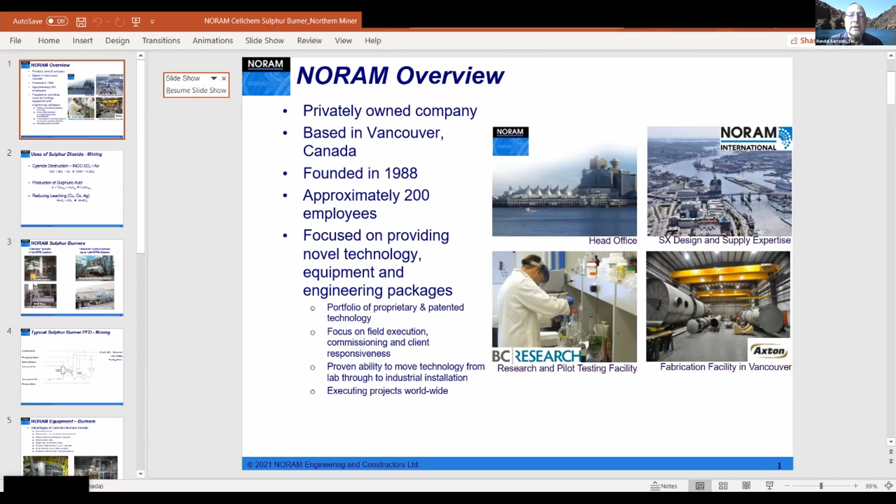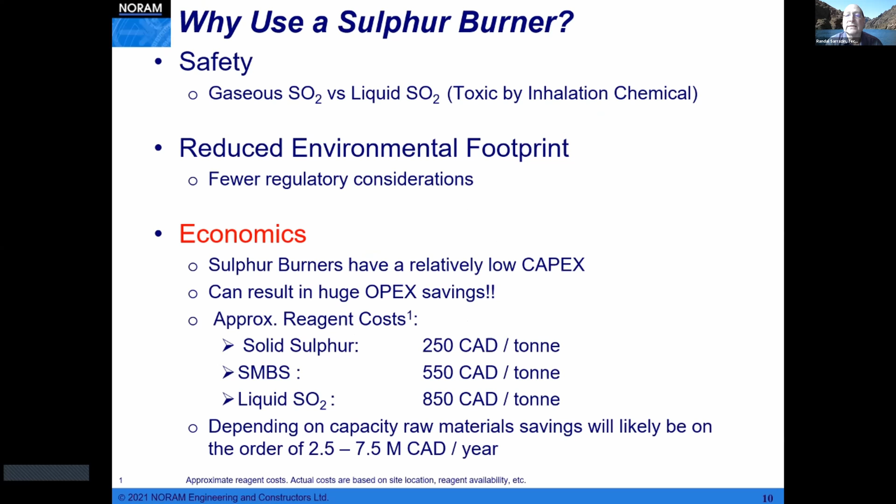Okay, that's great. So we are NORAM Engineering and Constructors. We're based out of Vancouver, British Columbia, privately owned company, founded in 1988, approximately 200 employees. Our head office, again, Vancouver downtown, that's where all the magic happens. We have a satellite office in Sweden, which handles our equipment supply overseas, and they specialize in the design and supply of SX, which is a high silicon stainless steel. We use that for absorbing towers, converters, heat exchangers, and piping and valves.

We also have a company, BC Research, in downtown Vancouver as well, and they handle laboratory research and pilot plant testing. We also have a world-class fabrication facility called Axton, also in Vancouver, and they do a lot of the equipment supply and manufacturing for NORAM, as well as third-party fabrication. Within NORAM, we have several business units, in particular the sulfuric acid and nitration groups, which are our two biggest and well-known worldwide. But we also have electrochemistry, pulp and paper, biosystems, and environmental as well.

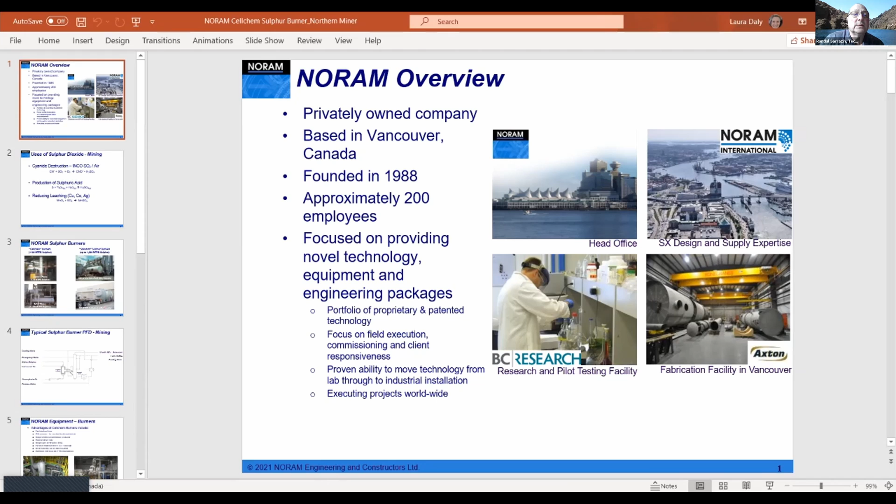So how does NORAM fit into the mining industry? Go to the next slide, please. Typically, we use sulfur dioxide in mining. Some of the uses of sulfur dioxide, especially in gold mining, are for cyanide destruction. You have production of sulfuric acid, and with a sulfuric acid plant, you also have leaching for copper, cobalt, and silver. So with sulfur dioxide, otherwise known as SO2, a lot of the mining sectors are using liquid SO2 right now. So NORAM has their own technology called CellChem sulfur burners. So next slide.

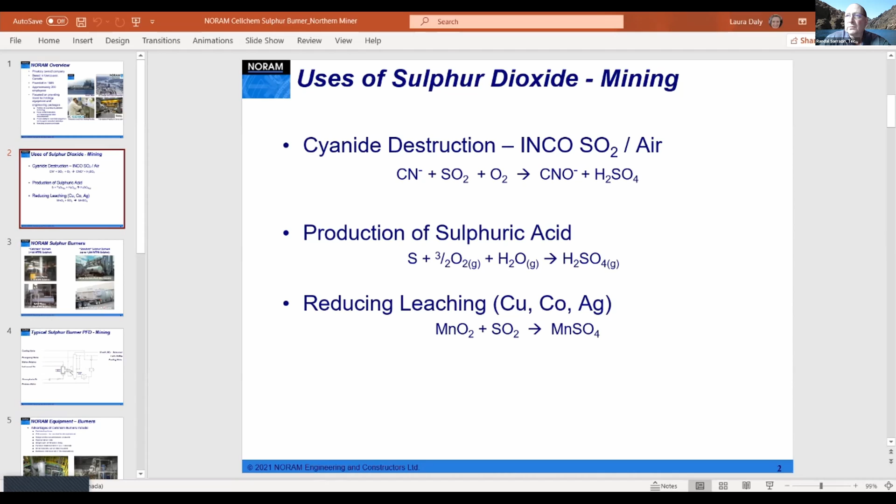So on the right-hand side, you'll see a typical sulfur burner for a sulfuric acid plant. Now, these types of burners can be used for up to 1,200 metric tons a day of sulfur burning for like a 3,000 ton a day sulfuric acid plant. The top right is a 280 metric ton a day acid plant, so you can see the size of the sulfur burner there. And below is a sulfur burner for an 850 ton a day sulfuric acid plant.

So for the mining industry, NORAM has what's called a CellChem sulfur burner. In the top left-hand corner, you see the size of the burner, which is relatively small. Right above the yellow box, you'll see the actual furnace is very small compared to a normal sulfur burner in an acid plant. You also have a quench tower, which is the vertical component. In the bottom, you have our spiral flame furnace, which goes from 4 to 120 metric tons a day. So the cyclone flame, in the top, is below 10 metric tons a day, and the bottom one is between 4 to 120. So next slide.

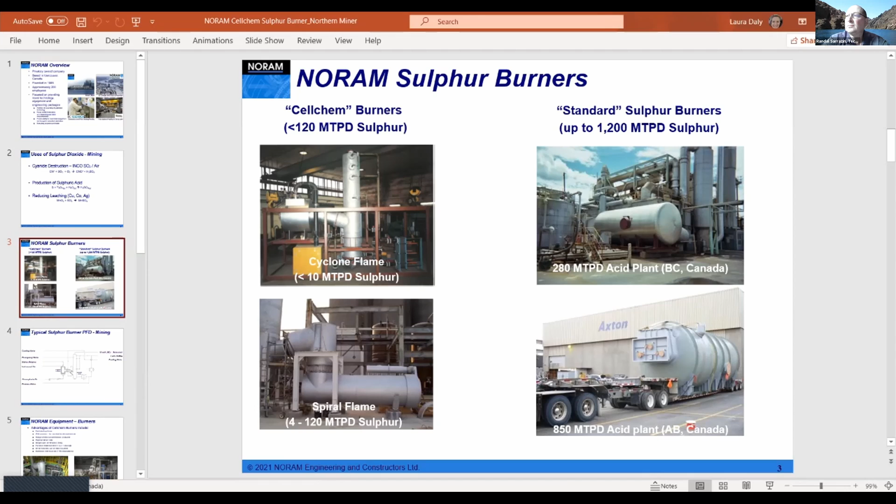So for our sulfur burners in the mining industry, especially with our CellChem units, you need a raw material, which would be your molten sulfur, and you need atmospheric air. The two of them burnt, you end up with SO2. So your other raw materials for this system loop would be cooling water and process water. On the end of the furnace, you'll see a quench tower.

Interesting, for most of the sulfur burning, what you'll see is a 9 to 11% SO2 concentration in a typical sulfur burner. With our CellChem sulfur burner, you see a higher concentration of 18 to 19% SO2, and your byproduct is essentially a 1% sulfuric acid by weight, and that can be turned around and used for effluent and several other places within the mine.

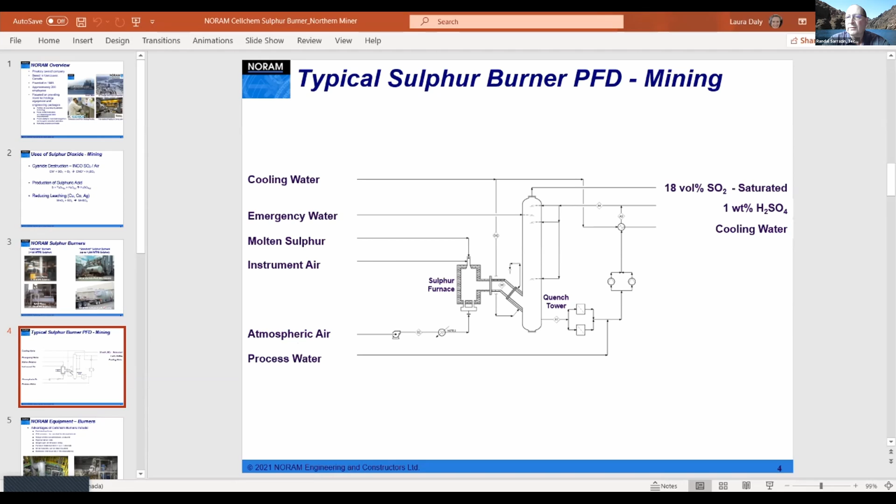So, what are the advantages of our CellChem sulfur burners? One of them is a very fast startup time. In the bigger sulfur burners, you'll have a lot of refractory, in which case on heat up, you have to take a long time to make sure the refractory is heated correctly. With our CellChem sulfur burner, you have extremely fast startup times with a very limited amount of refractory.

You have a wet process on the exit, which is combusted with atmospheric air, and you get a wet SO2. The range of SO2 concentrations can be reduced, so you don't have to run at 19%. So you have some flexibility there. You have a very high turndown ratio, probably as low as 25% of design. You have a single layer of refractory, again, that helps with the heating up and cooling down cycles.

And the residence time is very short, and that's the reason why we can go with such a small burner. We have an atomized spray for the sulfur, which ignites very quickly, a very, very fine spray. So the residence time in this type of furnace is much shorter than you would have in a typical sulfur burner. One of the big advantages is a very small footprint, and it can be skid mounted. And of course, we have an extensive reference list of over 180 installations of our CellChem sulfur burners.

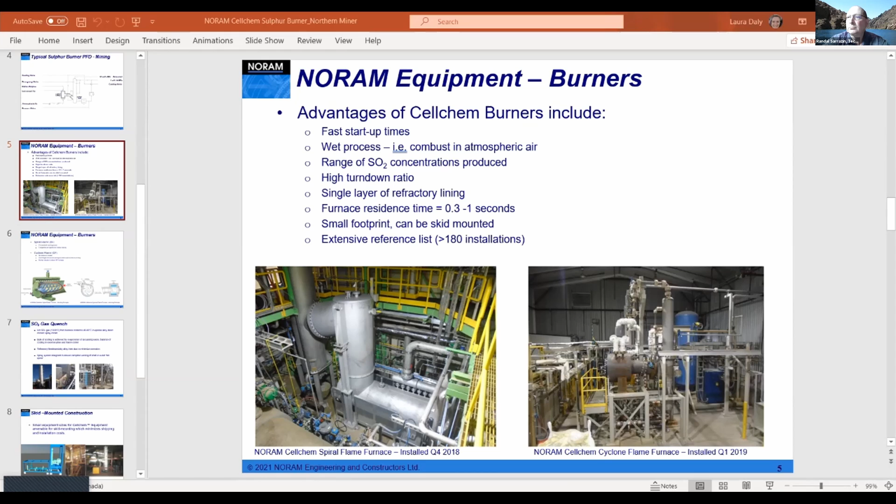So I mentioned we basically have two types of sulfur burners. We have a spiral flame, which is more for the bigger amounts of sulfur burn, up to 120 metric tons. And then we have the cyclone flame, which is for less than 10 metric tons. And you can see it's a very small burner. On our cyclone flame, we actually have no jacket on the vessel, and we have centrifugal forces and axial gas outlets to induce the mixing. And the burner size is like a quarter of the size of a standard sulfur furnace.

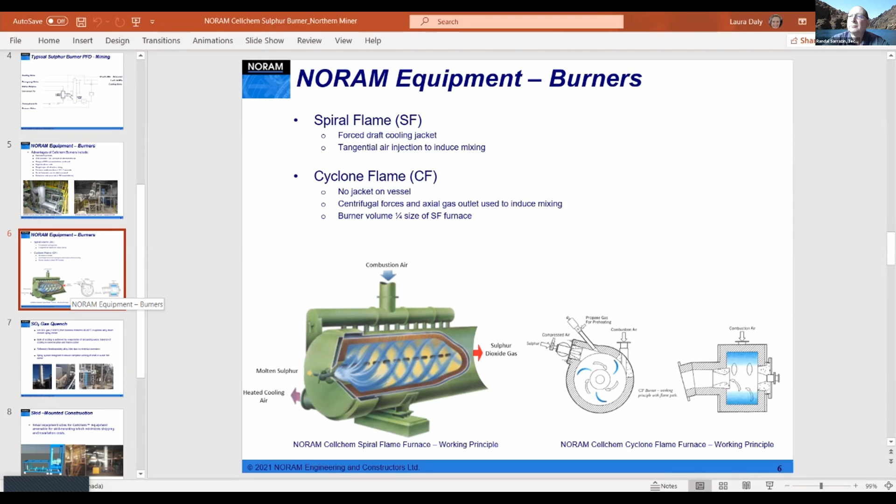Next slide. So I'm going through these fast because I know I only have like 8 minutes.

So I mentioned the quench tower. So our quench tower cools the gas from the furnace from 1300 degrees C down to 40 to 60 degrees C. And we have a special alloy spray cooler. The bulk of the cooling is achieved by evaporation of the circulating water, and the balance of the cooling is through an external plate cooler, and you'll see that in the bottom right-hand corner.

So the tower itself is refractory lined with a special alloy inlet duct to minimize the corrosion. So the spray system itself is designed to ensure complete wetting of the whole shell to avoid any hot spots.

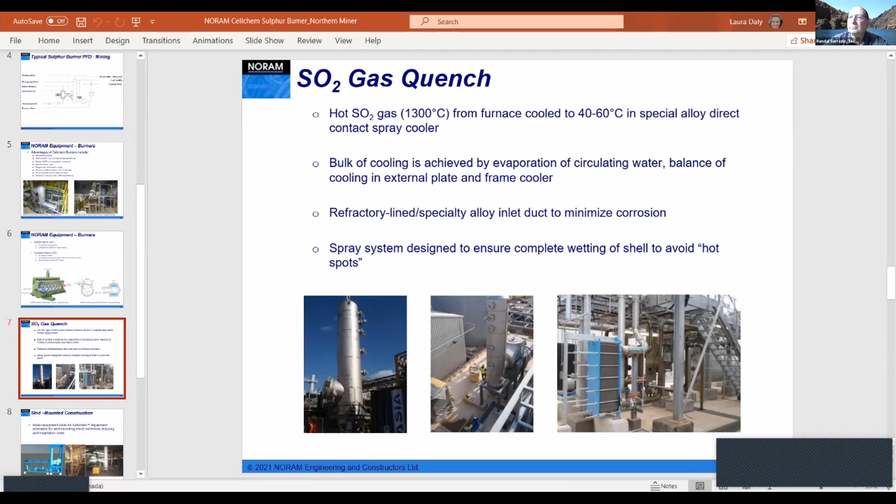So one of the biggest advantages of our Cellchem sulfur burner is the fact that it is a very small footprint, and it can be skid mounted, which minimizes your shipping and installation costs. So you can see a picture on the right-hand side, and of course the 3D model of what it would look like skid mounted.

As well, of course, we need molten sulfur to supply the sulfur furnace. So we also have a melting skid that can be supplied with the sulfur burner. So it depends if you want molten sulfur or if you want a prilled or bagged sulfur to come in. We have a melter skid mounted system that would feed the sulfur burner.

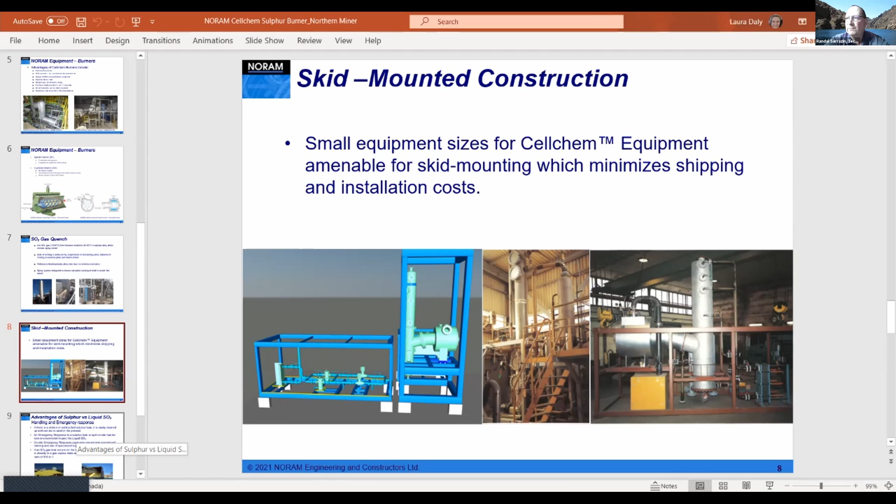So, again, I mentioned liquid SO2, which is very typical in the mines right now. Our Cellchem sulfur burner competes with that liquid SO2, and there are some advantages of using molten sulfur in our Cellchem system compared to a liquid SO2. First off, liquid SO2 is becoming very hard to get through the market. There's a lot of taxation and, I guess, in the transportation of the material, whether it be rail cars or tank trucks, you have tariffs being put on by the railways to haul it because it's a TIH material.

So when you're in remote locations, it's also very hard to get liquid SO2 to site compared to molten sulfur. Molten sulfur is probably one of the most traded commodities next to sulfuric acid worldwide, so the supply of molten sulfur is always going to be there. Same with prilled sulfur. In Vancouver, we have two great piles of prilled sulfur in North Vancouver. So from a handling and emergency response side, the prilled sulfur is much quicker to deal with.

Molten sulfur, if it's spilled on the ground, is going to cool off and just freeze up. So if prilled and molten sulfur leak, it's easy to clean it up and reuse it in the process. From an emergency response standpoint, a sulfur spill on site has far less environmental impact than liquid SO2. Your on-site emergency response personnel don't have to be nearly as highly trained to deal with prilled or molten sulfur as with liquid SO2.

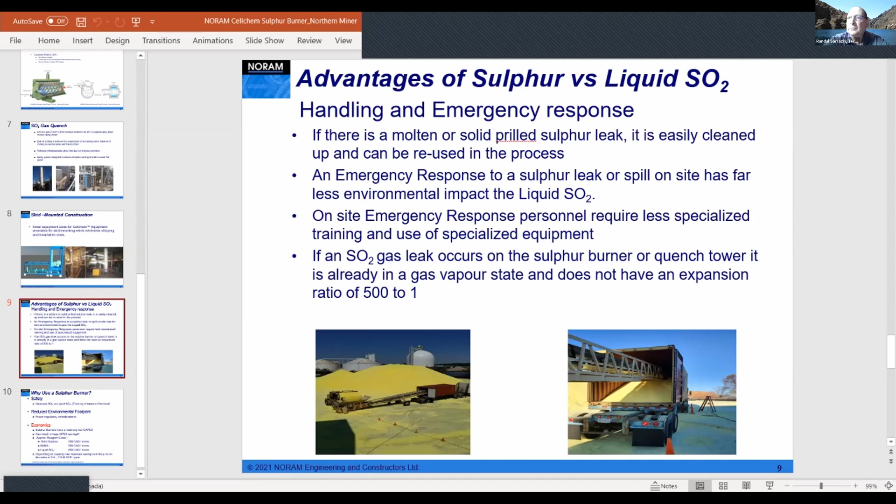So why use a sulfur burner? Number one, safety: gaseous SO2 versus liquid SO2, as I mentioned. You have a reduced environmental footprint and far fewer regulatory considerations, especially in Canada. When you're dealing with liquid SO2, you have what's called E2, emergency regulations with Environment Canada. So there's a lot of that to consider.

For economics, sulfur burners have a relatively low capex and can result in huge opex savings. If you're looking at reagent costs, a delivered cost for solid sulfur, and again these numbers move around quite a bit, you're looking at 250 Canadian dollars per ton, compared to SMBS at 550 Canadian dollars per ton, and liquid SO2, which moves up and down but usually on the upside, at 850 Canadian per ton. So depending on capacity, your savings for a Cellchem sulfur burner would be in the magnitude of 2.5 to 7.5 million dollars Canadian per year, which is pretty significant.

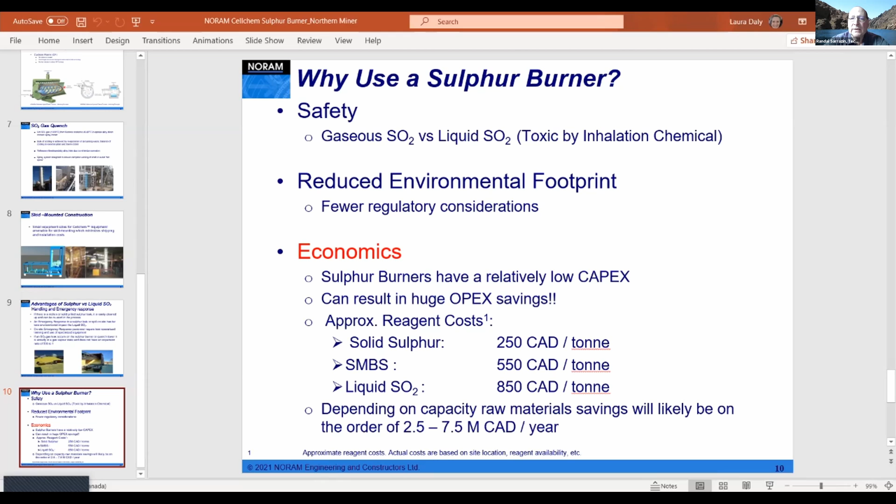So again, the Cellchem sulfur burners, especially in remote locations, have very low maintenance. They're skid mounted, can be placed there and really just run. All you've got to do is supply it. So essentially, that's the presentation.

Excellent stuff. Thank you very much, Randall. A very compelling case there. Given the advantages of the sulfur burner and solid sulfur, where is the trend in the industry right now? Is the trend toward sulfur burners compared to liquid? Well, we're sure hoping so. That's why we wanted to bring our technology to the mining sector, because it still seems that they're leaning toward liquid SO2. It seems to be just the go-to thing.

So we wanted everybody to know that there is an alternative, and we think our Cellchem sulfur burner, based on the fact that it's got such a small footprint and can be skid mounted and brought to site, is very viable versus liquid SO2. Environmentally and for ease of operation, our Cellchem sulfur burner, to me, is far above putting in a liquid SO2 storage tank and trying to truck liquid SO2 into remote locations, which is very hard.

Molten sulfur comes by tank truck, but prilled sulfur can even be brought in by dump truck. You can use sea cans, you can bring it in tonner bags. So there's a far greater ability for supply than liquid SO2 coming to site. I think that's one of the huge advantages of sulfur coming to site.